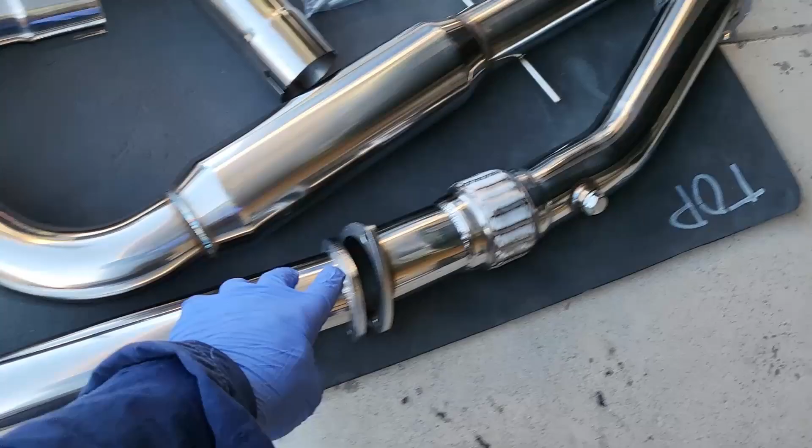And this is a full turbo back system. I chose the turbo back system because I thought I might need to reuse some of the turbo components. So this part here is from the dump pipe. It goes from the turbo. And then these two extra parts here are what I bought separate to the kit. This was probably about $80.

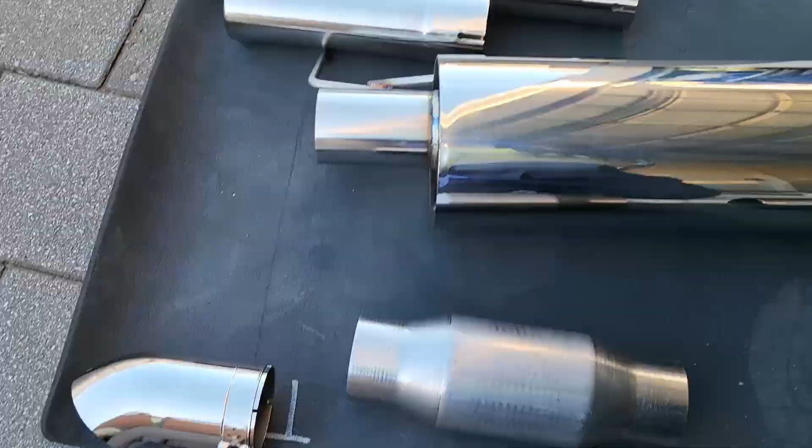So I wanted to run a catalytic converter. This is a Euro 4, I think, standard, 400 cell. And I also wanted to run a dump pipe because I didn't want to cut the back of the bumper.

For how cheap this kit was, the welds are quite good, and it's obviously nice and shiny. Lightweight, as you would expect, stainless steel. But the quality seems pretty good. I'll let you know the difference when I start fitting it up, because that's usually where these things go wrong, but pretty pleased so far.

Okay, the one thing to note with this exhaust, you can see the light coming through, so this is a straight through with insulation on the sides, so it's probably going to be pretty loud. We'll see. I'm also using the original exhaust hangers. I've just cleaned them up.

Have I mentioned that I need a hoist?

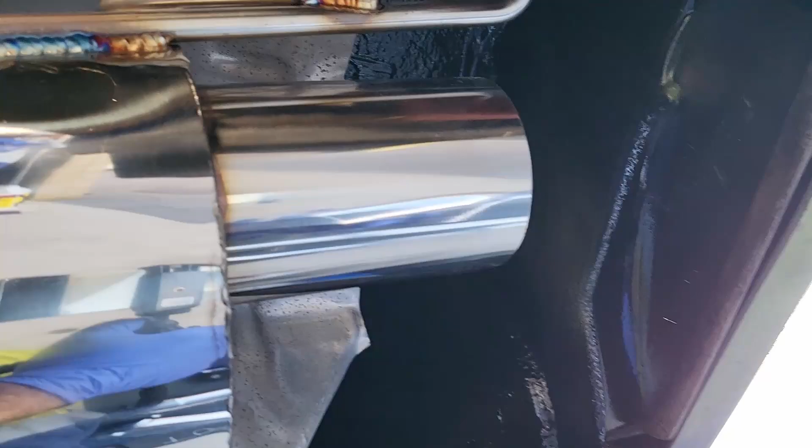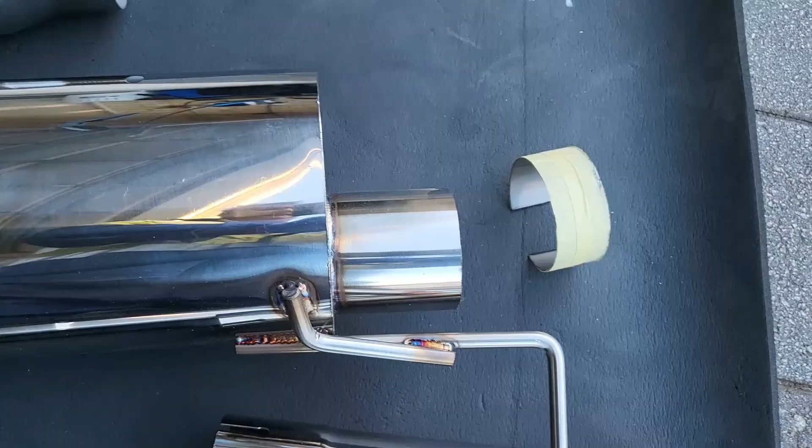So fun number one, the exhaust tip is really close to the back of the bumper, so I might need to chop that to get that to fit. This is the dump pipe, which if I put it as far in as possible, it'll be okay. Okay, so I've cut about 30 mil off the end of the exhaust tip. The dump pipe, because it's full 3-inch, or whatever it is, just slides completely over the top. So I have got some tolerance if I need it.

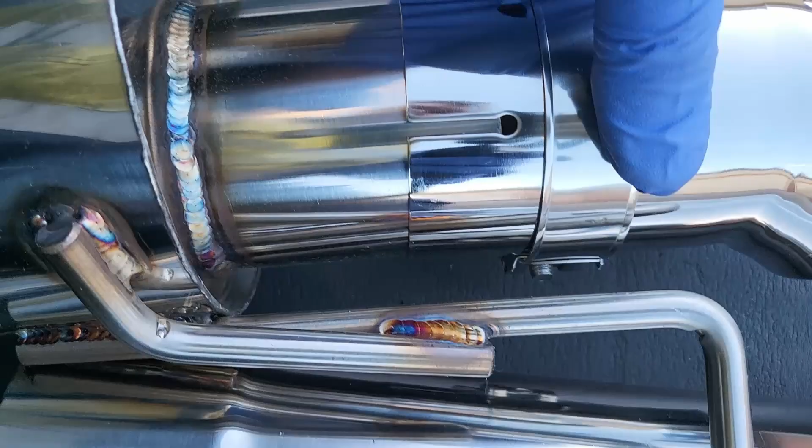All right, let's try fit this again. So this is one of the exhaust tips provided, and it's one of the others. So if I fitted this on the Beetle, yeah, it'd stick out, I don't know, how far is that? 400 millimeters, which would be kind of funny.

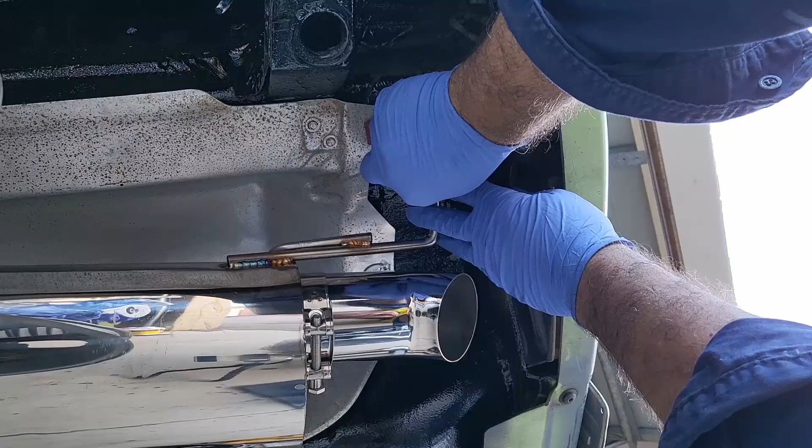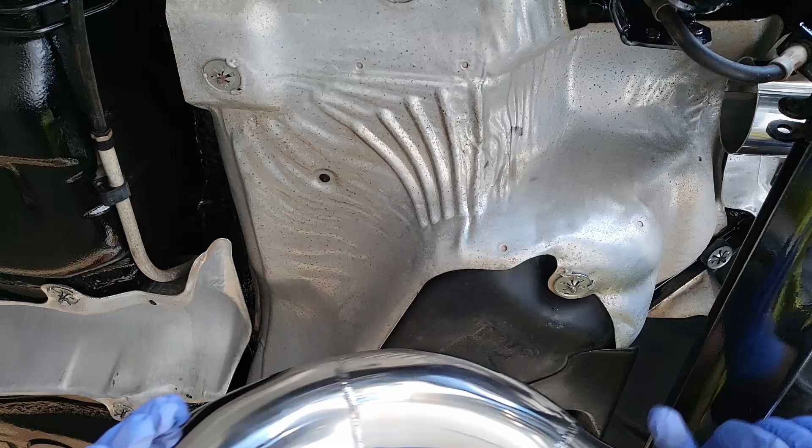Dump pipe's not too bad. Would prefer it a bit further back, but that's okay. It's pretty good. So I made a bit of a blunder. This is actually the mount that should go on the very rear of the exhaust box where the tip is. So I don't know if you can see that still. I'm just going to swap that one out off camera.

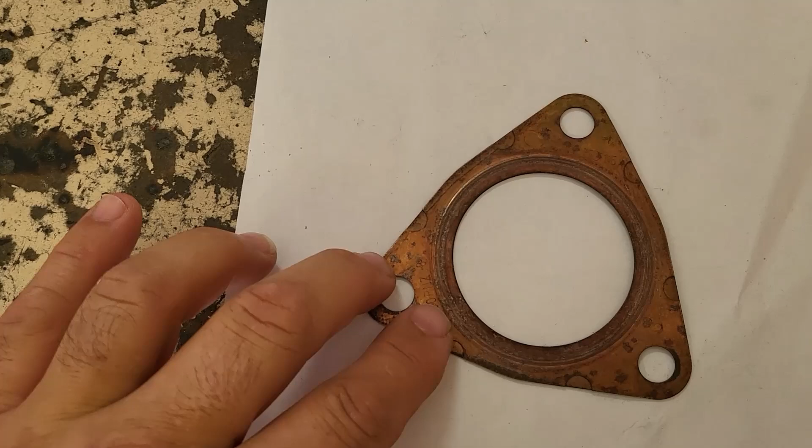So before I start building the actual down pipe from the manifold, I've got some PVC pipe here, which I just got from my hardware store. It's noted DN50, but the diameter is actually 56 millimeters, which by a lovely coincidence is actually the internal diameter of this gasket that goes onto the manifold as well. So my plan is to use this plastic pipe to prototype the final down pipes.

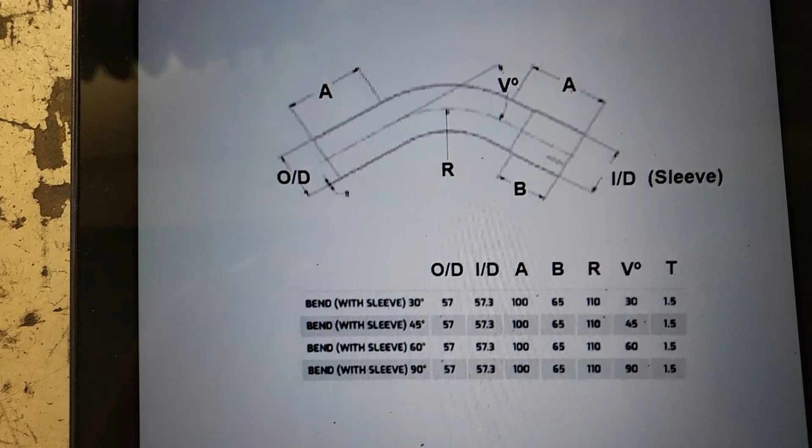What I have here is the bend radius and diameters for a 2¼ inch pipe, which is 57 millimeters outside. So what I'm going to do is transfer these bends to this pipe so I can use them as a pseudo mandrel bend, which is specific to that pipe diameter. I'm going to actually cut the pipe using a pie cut method.

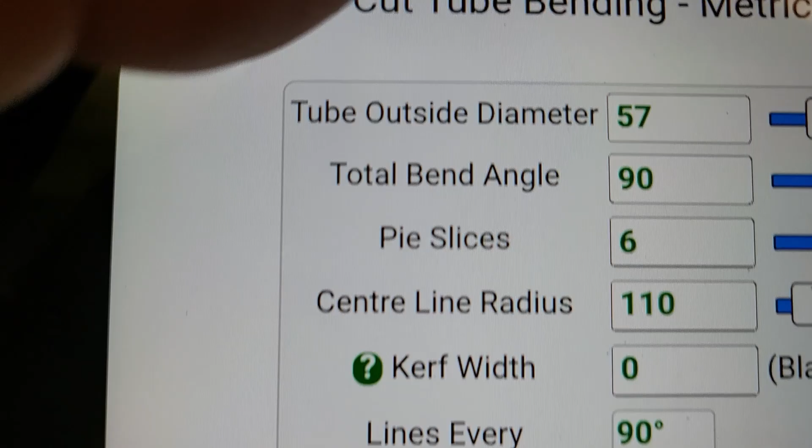So basically you just enter the inputs here and it'll give you what's required to achieve the pipe radius based on the diameter of the pipe and the bend that you want. So I can actually reduce the number of pie slices if I want, and you can see here that it's reduced the number of cuts, but it has made it more polygon shaped.

Draw a horizontal line on both sides of the pipe, which goes exactly through the center of the pipe. That way when the pieces are cut, I can align them correctly, because if they're slightly out of kilter, then that actually represents a cut and re-weld on the actual metal bend.

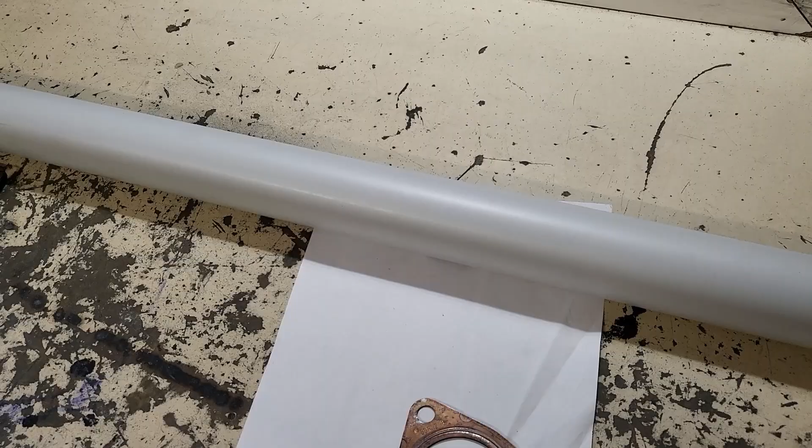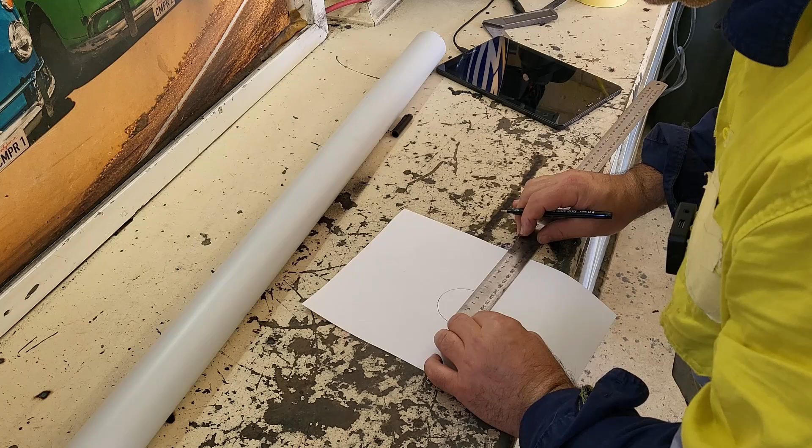So what I'm doing here is I'm just tracing the circle off the end of the pipe and then just trying to find the center of the pipe. So just going to roughly measure middle, one direction, middle, the other direction, 28, and that'll give me the center. I'm just going to draw one 90 degrees to the other. Not that I need it, but just in case.

You could easily draw this in CAD or something. This is just a quick way to do it because I don't have the computer in front of me. So from this point now, I can mark at least on one side of the pipe a line which goes through the center of the pipe.

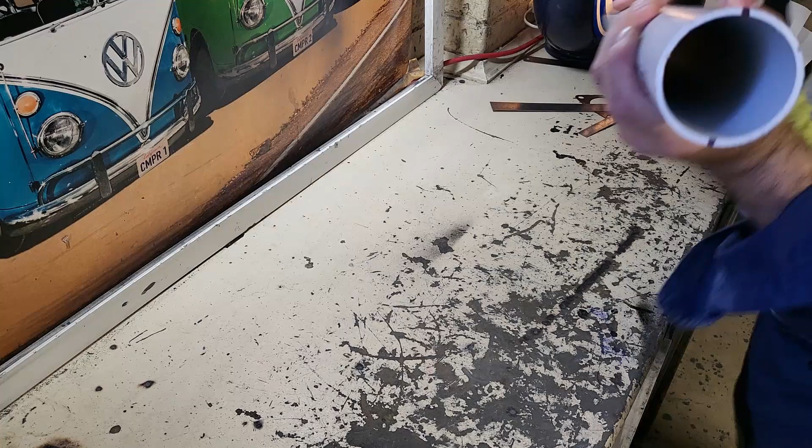All right. So now that I've marked one end, place one of the marks directly on the bench and then hold that so that's the only point on the bench, and then use my eyeballs to mark that exact same point on the pipe, which is easier said than done. From that point, I can then mark the other tangent.

With both ends marked, so now I'm going to cut where those marks are just a little bit. You don't have to cut them both at the same time. One there. One there.

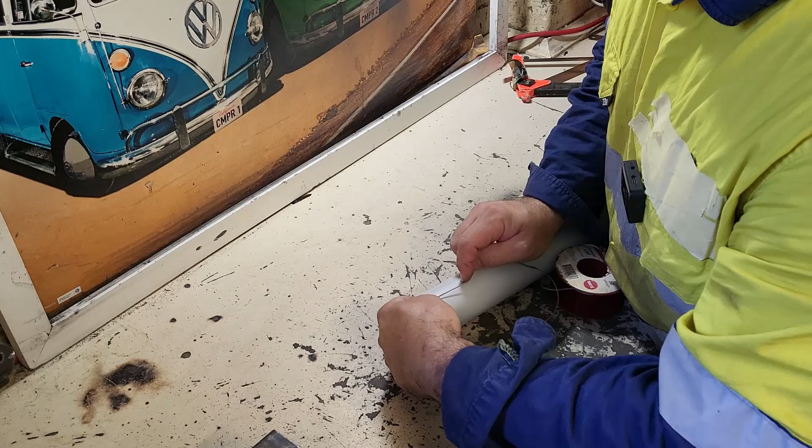All right. So next, get a piece of string. Just put one end in the slot you've cut. There we go, like that. And then just straight up pull it to the other slot. So I've got that in place. I just hook it into the slot on the other side. There we go. A little bit of tension.

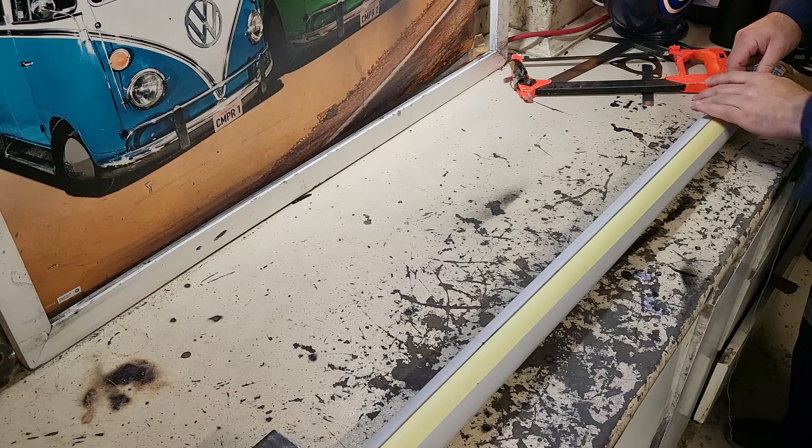I'm going to use tape. So basically just run some tape on both ends so that the tape follows the line. Put a bit of tension on the tape as well. You see here it's making a straight line. Just dump the tape on there. Gently put the tape down. You can take that off now. And now you've got a straight line down one side.

And then you can just run your marker using that tape as an edge. Like that. Again, it doesn't matter if you run out on this side because the edge will be absolutely straight if you're running it up against the tape. Take the tape off and you see you've got a nice perfect line. So just so you don't use the wrong side for now, just mark it with something that tells you that that's the good side. And repeat the process for the other side.

So building these downpipes is going to be an exhaustive process. See what I did there?

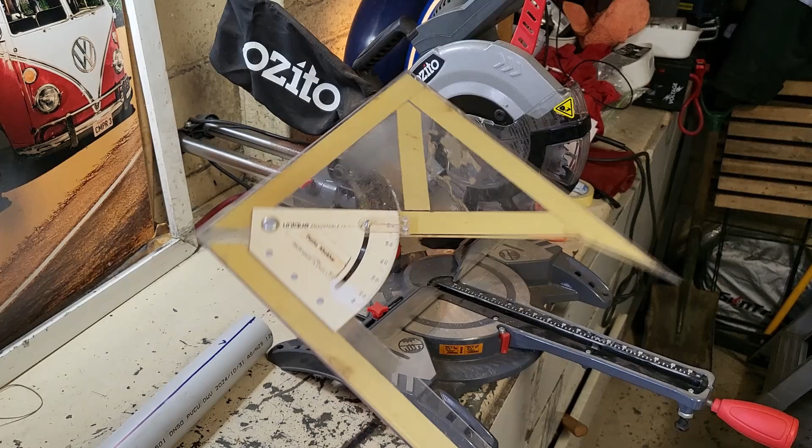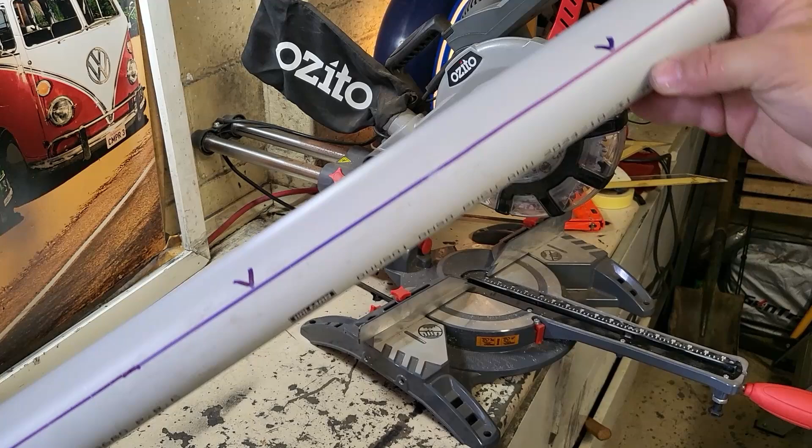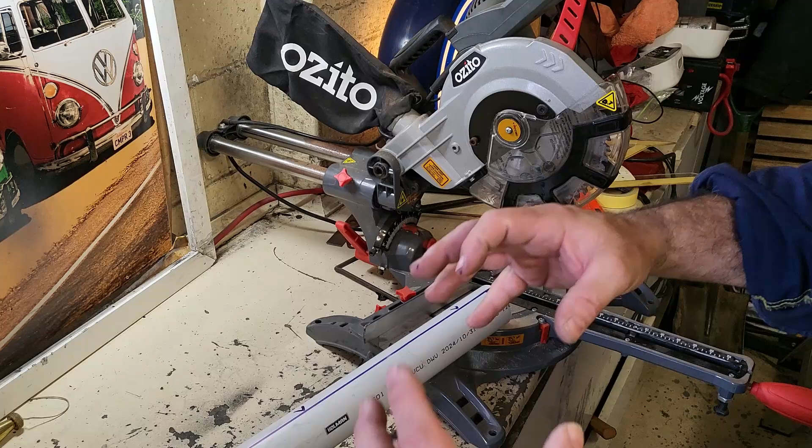I'm not going to necessarily trust the angle that's shown here. I've actually got this from my old college days. I'm going to set up the blade so it's actually as close as I can get to 11.3 degrees, and then I'll do my cuts from there. The other thing I'm going to do is this line here. I'm just going to line up with the top of this bar here, and then I'm going to number every piece that I cut so that it'll be connected to its adjacent partner. That way, if this line runs out, it really doesn't matter as long as I'm connecting the correct side to each other.

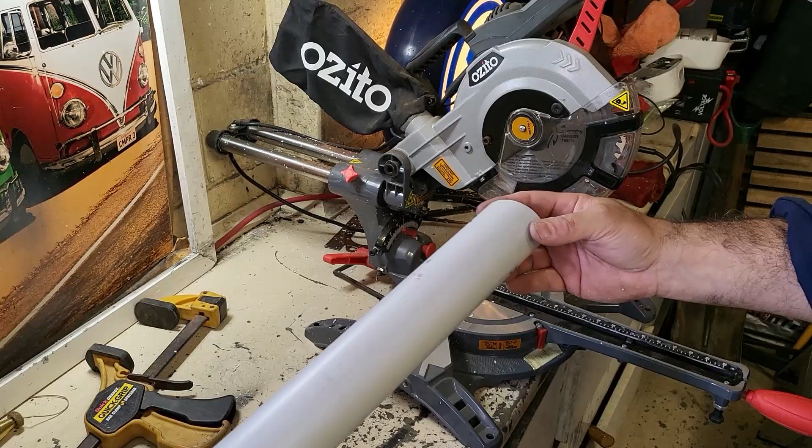So it's 11 degrees spot on. To be quite honest, getting the 11.3 is going to be nigh on impossible, so I'm pretty happy with that. So this is the way I cut my first cut. So if I cut my second cut using this line and the same point on the gauge, I will get the V. What I really need is a middle dimension, because then I can line the blade up.

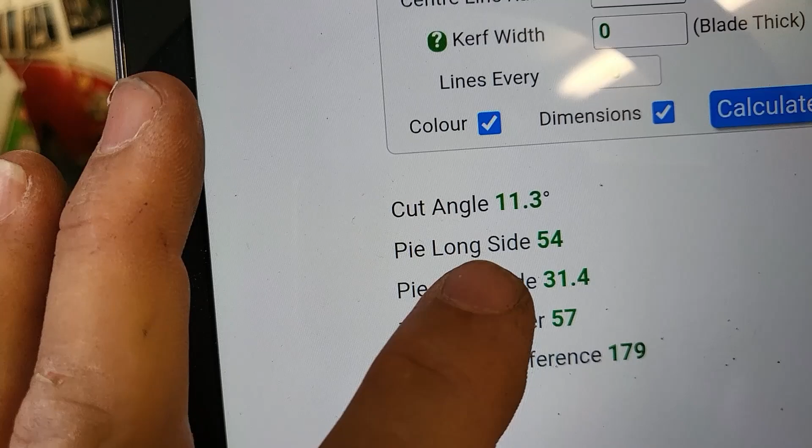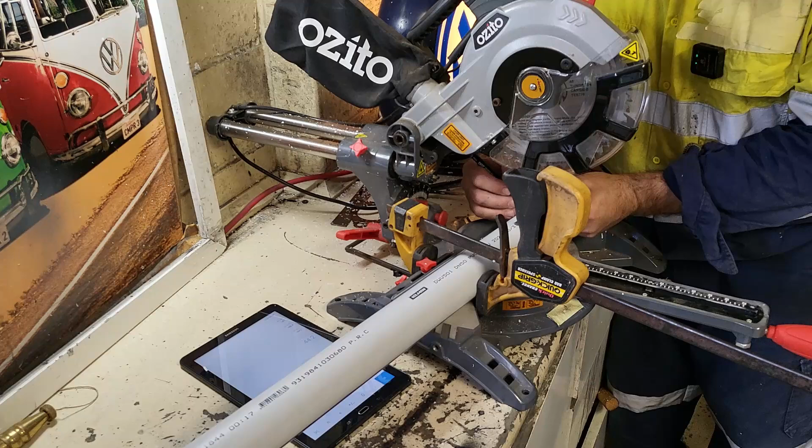So now that I've cut my first segment out and I'm happy with the angle, I've marked a portion on the gauge. Now all I have to do is just bring the pipe to that tape line, cut, rotate, cut, rotate. So from this point on, it'll kind of be production line.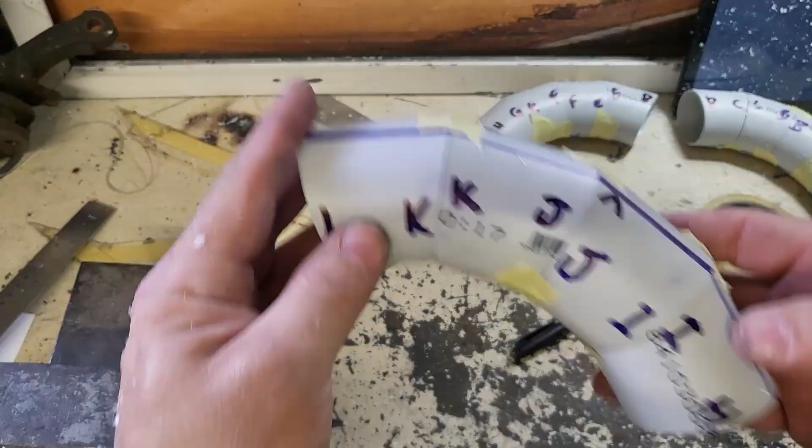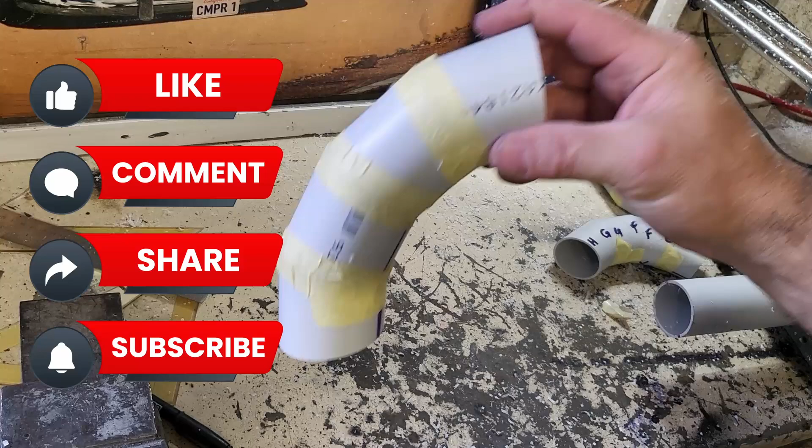So now that I'm all set up, it's only taken me about 5 minutes to produce a bend, a 90-degree bend. Now, the beauty of the pie cuts is that if I need a bend that's not quite 90 degrees, each bend being, in this case, 11 degrees, I can take that out, and that simulates cutting a mandrel bend. So obviously with the numbers of pipes, I can combine them as I need to and rotate them as I need to. And that is a good analog for building my pipes.

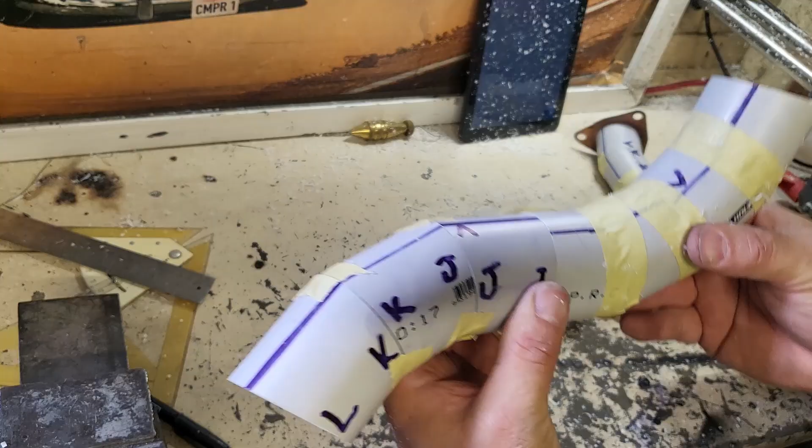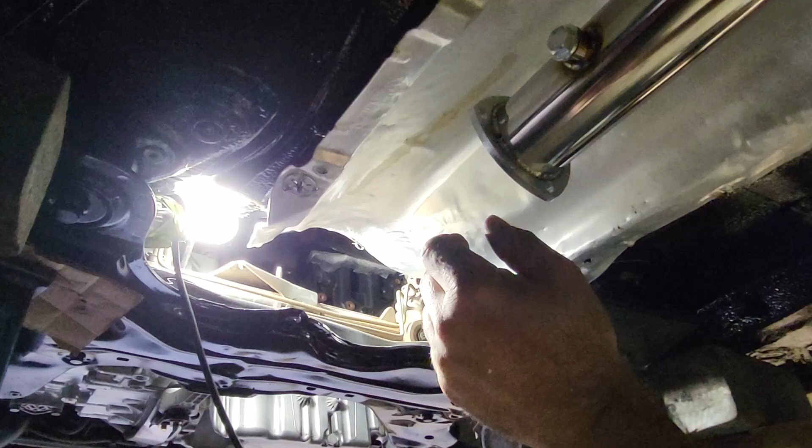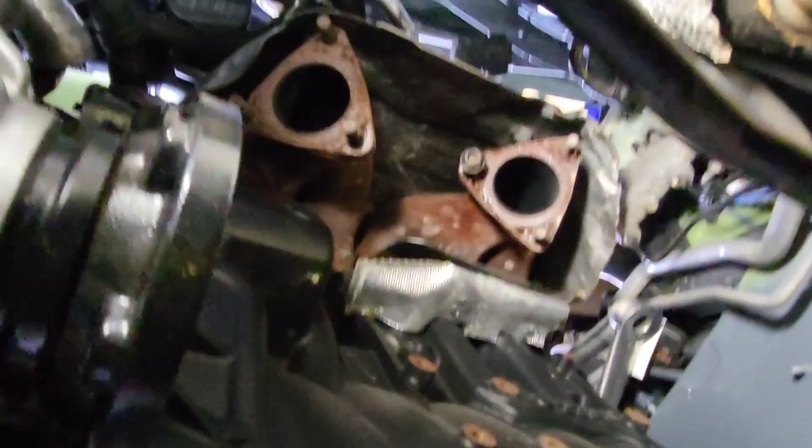The exhaust manifold actually sits underneath this area here. I'm not going to take any of this off just yet because this has all got brand new gaskets and torqued down. So I prefer not to have to replace all those again. So I'm going to work from the bottom. So this is the reason why I decided to fit the exhaust first, because I actually need to know the axis of the exhaust so that I can bring the dump pipe from wherever it's coming and align to this point. So there's the two outlets from the factory exhaust manifold.

So I've got a short length of pipe here, and I've just taped the exhaust flange gasket to it. So I'm just going to pop that in and see where it lies. All right, so that's pretty good. Probably need to shorten that up, and then feeding it onto the other one. Yeah, the other one's got stuff in the way, so let's have a quick look anyway.

So I also need to add the bellow, the flexible bellow. So I need to add that into my calculation. So what I'll do is I'll just use some of this straight pipe to simulate the bellow length, and then I'll start my curves from that point.

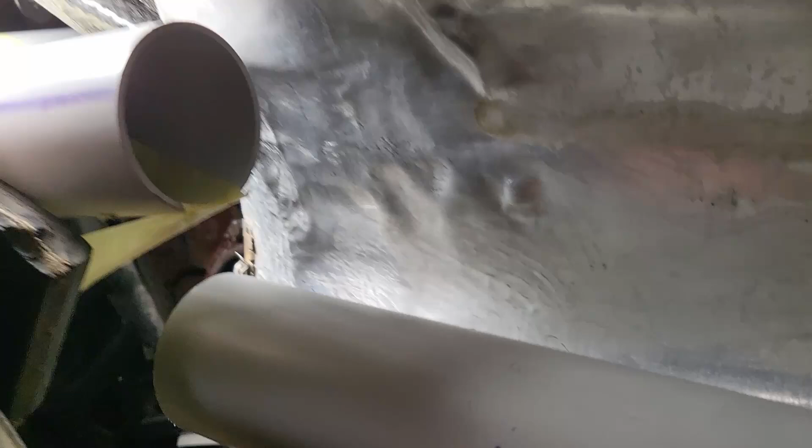So after a few hours, I've got the first dump pipe done. There are 2 banks on this, so I've left enough room so that the second pipe can fit in next to it. So I've got a slight bend at the top, straight to simulate the bellow, and then a complex bend here. So I'll start working on the second down pipe. And I've also made sure that I'm clear of the drive shaft.

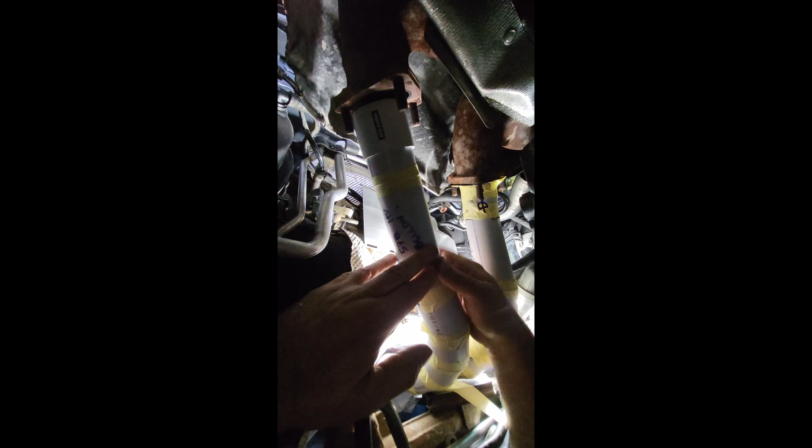So here's a finished product, if you will call it that. So it doesn't look the prettiest, but it gives me all the information I need to know. So tracing these lines, I can see here, this goes off center, so there's a twist there. I can see there's a twist here. The sleeve was good because it allowed me to put the bottom in place and then map this long piece without having to go back and forward cutting slices out.

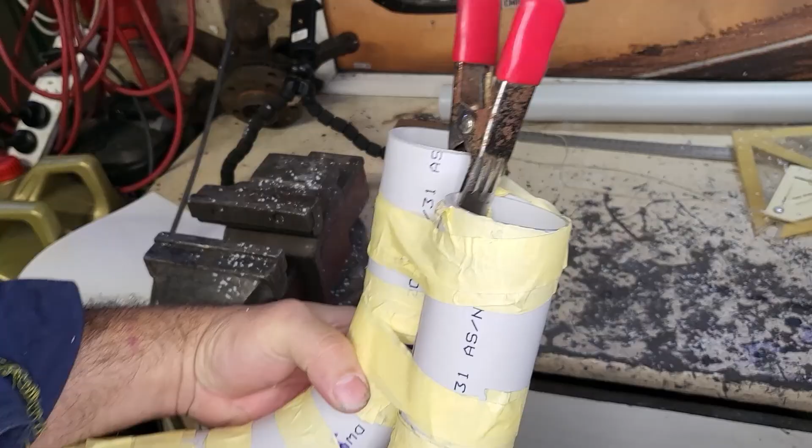I'm pretty happy with my dodgy exhaust prototyping tool. The other nice thing is that I can keep these. I don't have to throw these away, so that if I ever make an exhaust again, I've still got these cuts that I can prototype again with.

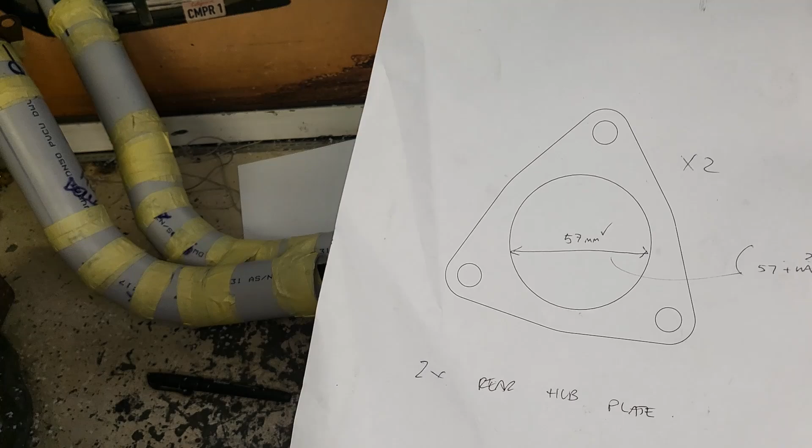The flanges to the R36 are not any conventional flange shape or size. I've actually traced the R36 gasket and entered it into CAD. So with this file, I'll send this to the laser metal cutting company and then get them to cut me 2 flanges out.

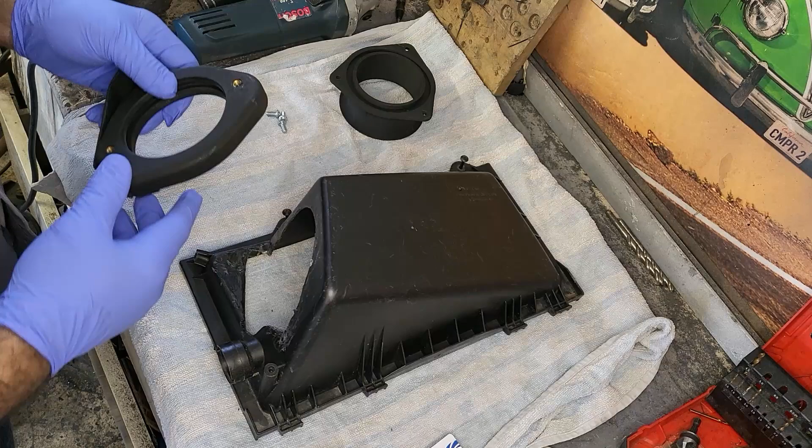All right, so the first thing to do, which unfortunately I did off camera before I started filming for the YouTube channel, but you need to cut the hole to suit the adapter. Okay, so this is the outside, the highly rounded area. So to initially cut the hole, just use this as a template. So you've got this inner ring here, so I would start with that and just slowly cut the material until you get the correct shape.

Now, a couple of things to bear in mind is that this area here, I had to use a heat gun or a hot iron just to bend the plastic to get it to conform to a uniform shape, rather than build the adapter to an awkward shape that wouldn't slot in easily. So the other thing as well, this needs to be printed from ABS or some high temperature plastic so that it won't deform under the heat of the engine bay.

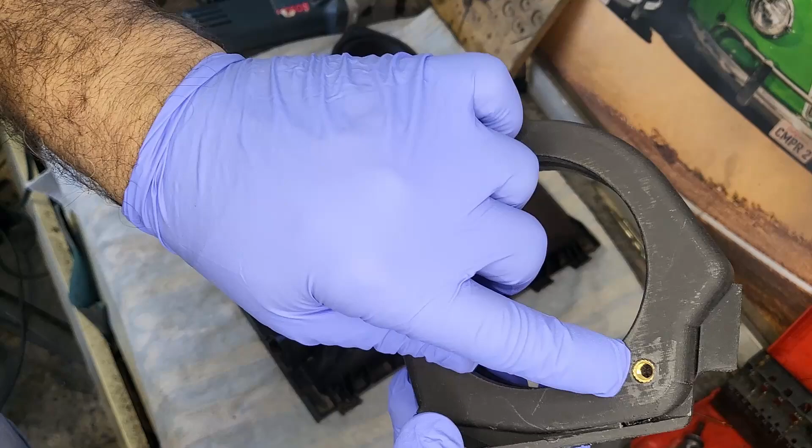Also, what I've done here is I've put in some brass threaded inserts. This side is for the MAF. This side is to just give a mechanical key for the horn that's on the inside. So you'll end up with these 2 screws being the locator for the MAF.

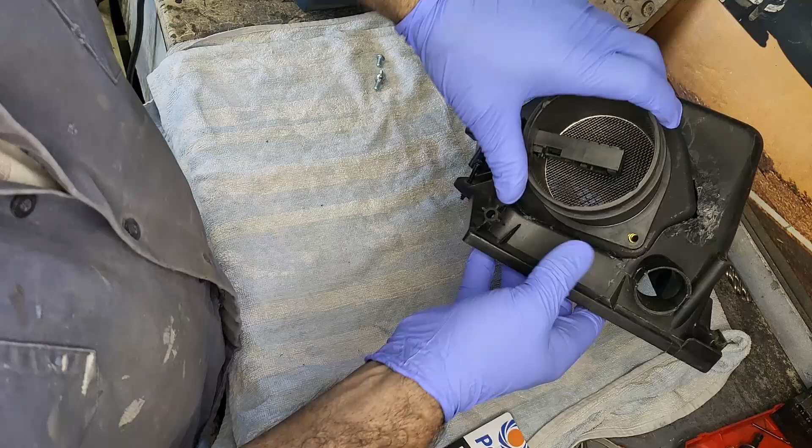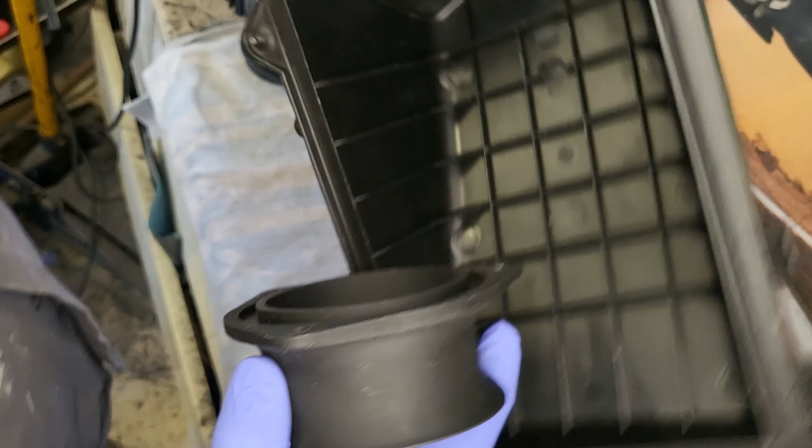Going to the inside, so the bolt holes are asymmetric. You can't really see it here, but they only go in one direction. The print actually has an arrow, and the other side has an arrow, which is a bit hard to see here, but you will see it on the 3D model. So with that in place,

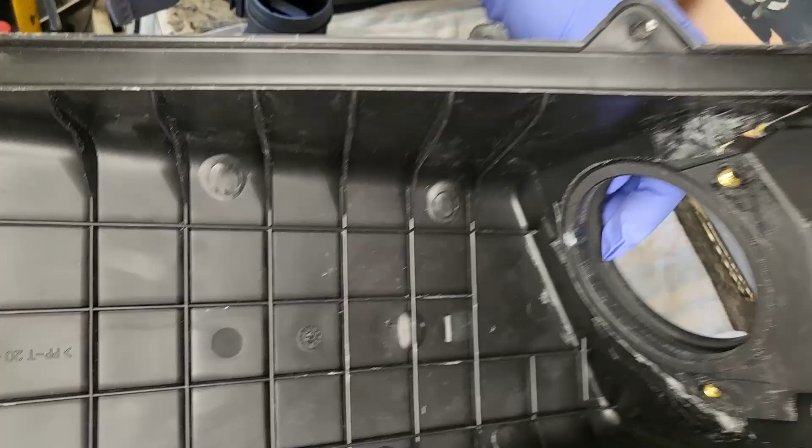the arrows just line up, and you'll see that there's a ridge inside there. There's a lip here, so that'll form the seal. The other thing to note here also is that there is a ridge inside the outer ring. That's to allow for the original O-ring.

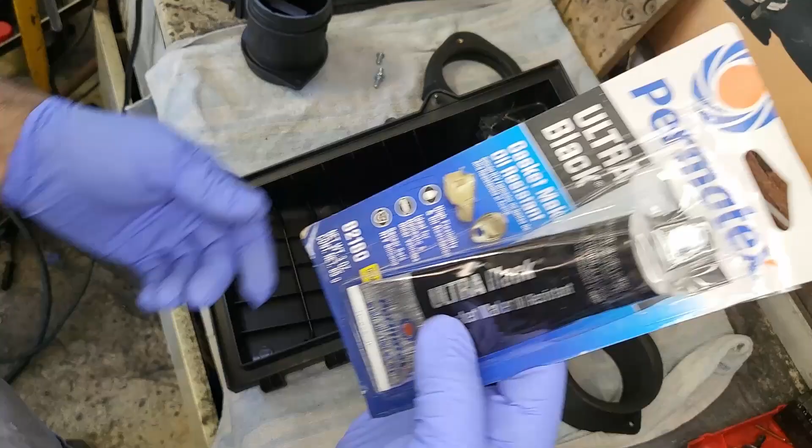All right, so the next stage is essentially gluing. Now you can use epoxy. I like this stuff because it's oil resistant and it will cover some of the areas where there's a little bit of a gap. So I'm just going to go ahead and glue it.

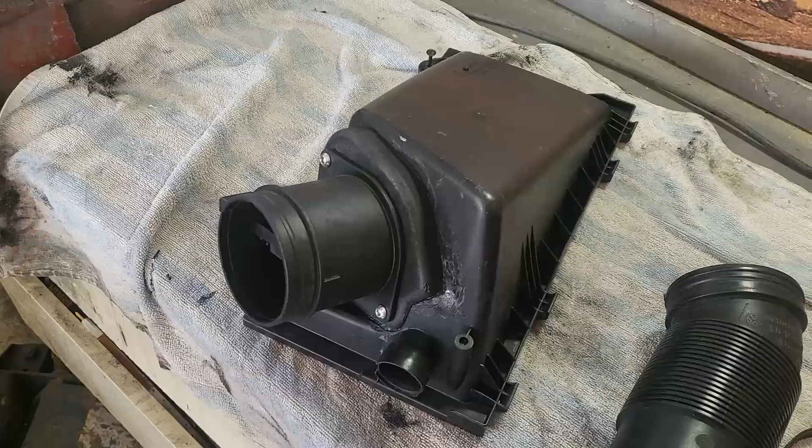So I let the sealant dry overnight. The adapter's all nice and solid now. I've just screwed on the airflow sensor. I haven't inserted the seal for the sensor because I've got to pull this apart again because I want to paint all of the plastics in the engine bay to match.

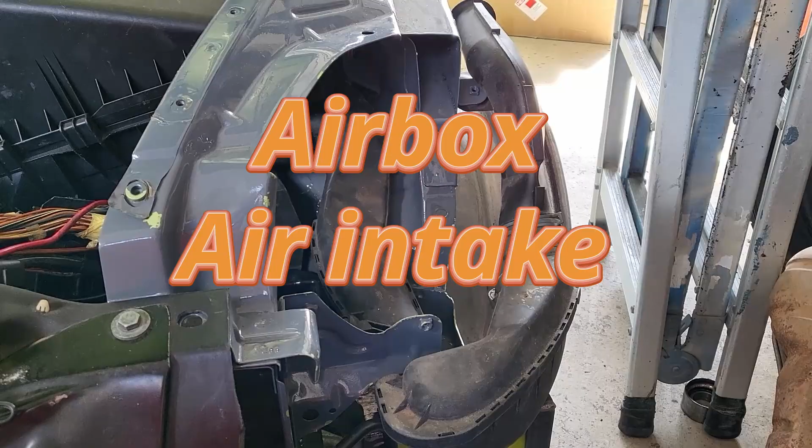So I installed the airbox, sitting there in its correct location because obviously it was the stock Beetle one to start with. Correctly fitted up now the main pipe to the inlet, so everything's nice and cozy. I'm just going to look at the airflow path into the airbox itself.

So I've just mocked up the original airflow pipes, and wow, what a cacophony this is. A lot of bends, a lot of restrictions. Also, looking at the port at the end, yeah, it doesn't cut it for me, very small.

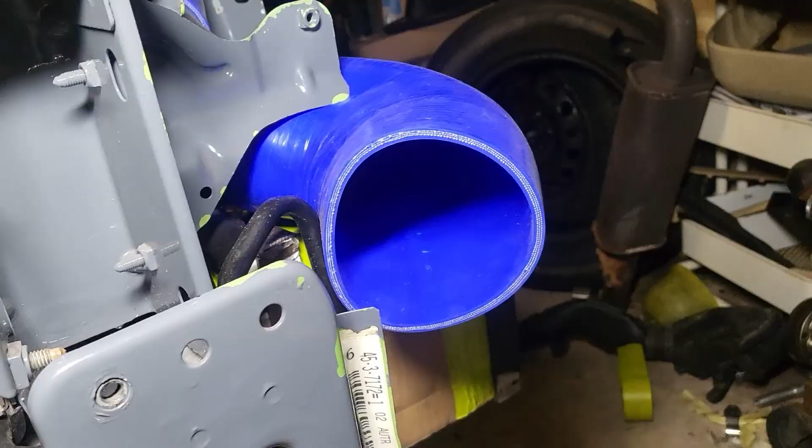So after a lot of pondering and looking at different ways I could attack this problem, because it's not a straight path, it actually has to bend around the headlight and all sorts of horrible shapes, I ended up deciding to go with silicone pipe. So this is a 103 millimeter internal diameter silicone pipe.

I just chose this diameter for no particular reason other than I thought it was the biggest that I could fit in this area. So this is the path that I'm looking to achieve. So from the airbox, bend, and then come down to the front behind the bumper. I'll probably turn this a little bit. I still need to make a bell mouth ending for this as well, and I'll print a 3D adapter.

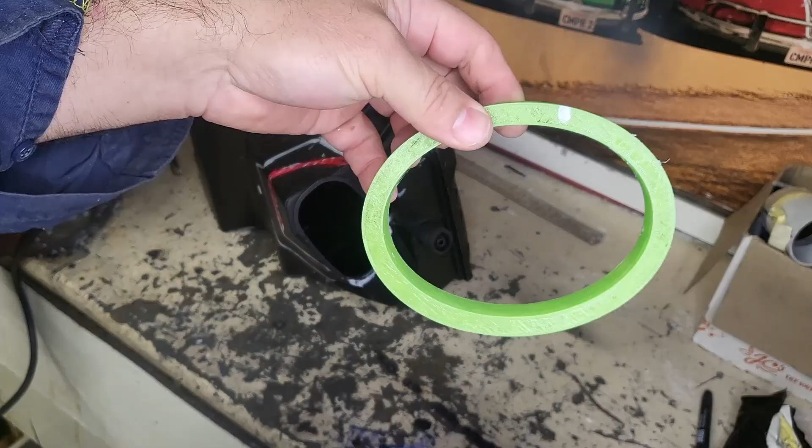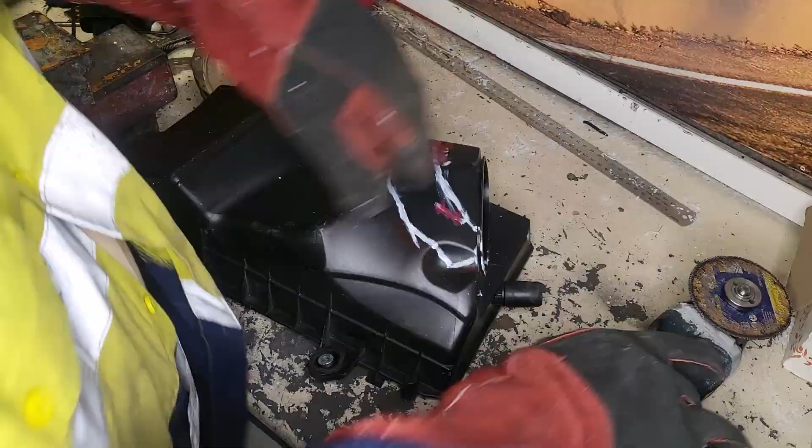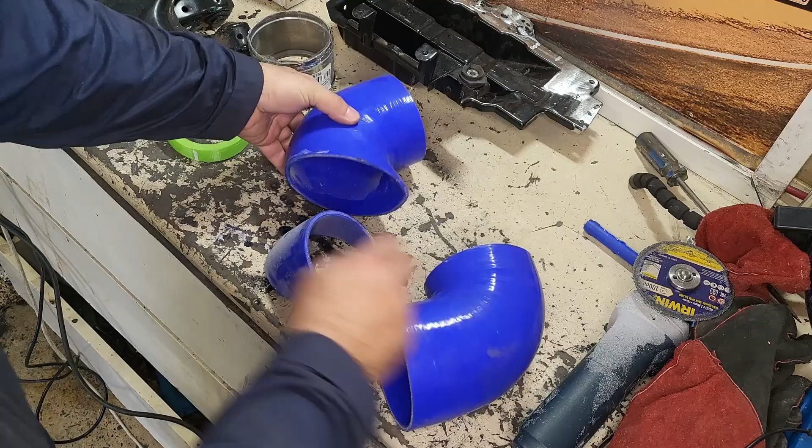So I've just designed and 3D printed this plastic ellipse just so I can work out how to fit this silicone pipe onto the bottom of the airbox. So here's the second version of the intake pipe that goes to the airbox. I've already cut this one. So this is going to butt up, something like that, forming this weird angle shape.

So my next task is, I bought these rings intended for silicone hoses to join them. So what I'm going to do is I'm just going to try and create this to be an oval so that it matches what's coming out of the filter box itself. I'm also going to use this as a bit of a guide.

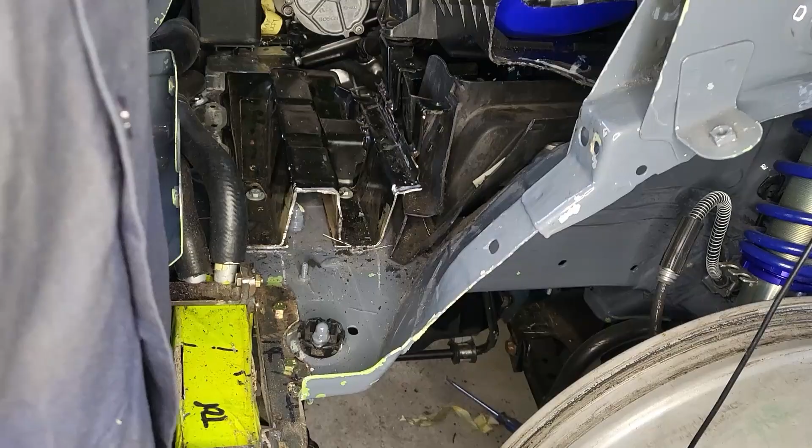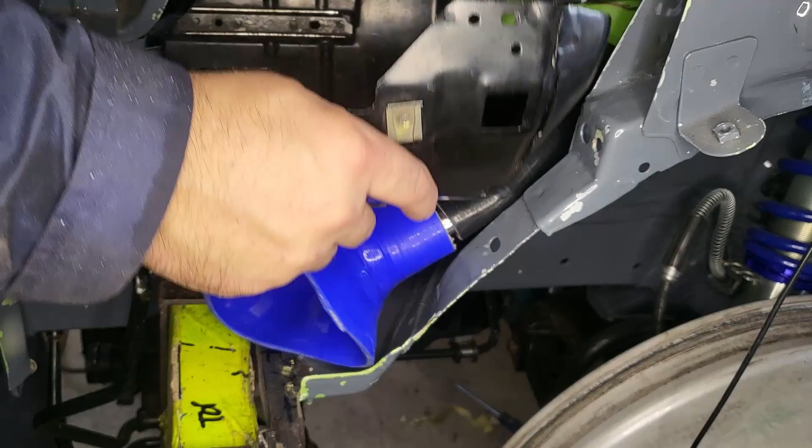All right, so after a lot of squashing and bending, I think I've got it. Hard up against there. The light bucket. Go in there. Just some temporary bolts for now. It's only for alignment purposes. An extension of the port. I can rotate this a little bit as well, which is a nice bonus.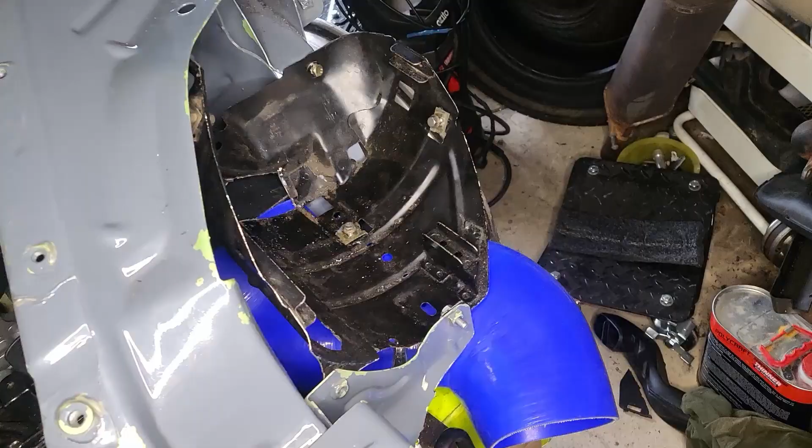All the stainless steel joiners are in. Also, that one there is in. It's a bit rough, but it's in place. I finally got the cold air intake in the position where I'm happy. Fits under the headlight carrier and not too constricted as it finds its way through to the airbox. It's on the limit of the battery, but I'm hoping that should be okay.

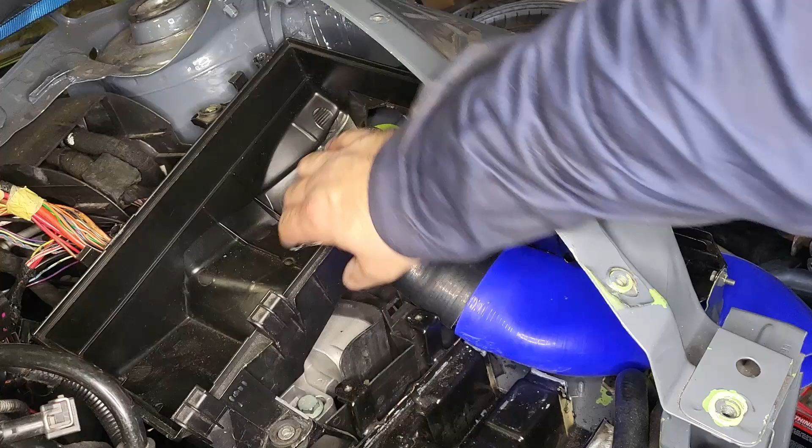So now I'm going to go off and design a new adapter for this part here, which won't take me long, and then I'll have to finally print it in ABS. So that'll probably be a week's worth of printing.

Okay, so the exhaust went in. It was a pretty straightforward process other than the exhaust tip. My only other comment is that the prongs that go into the mounts are a lot thinner than the OEM ones. So I'll need to put a packer around those prongs so that they don't wobble inside the mounts.

The prototyping went really well. I was amazingly surprised how well that went. So that's good to go. I can now order the bends that I need and also the flanges. The airbox, yeah, 3D printing just takes a long time, so I'll be continuing and finishing that up in the next episode.